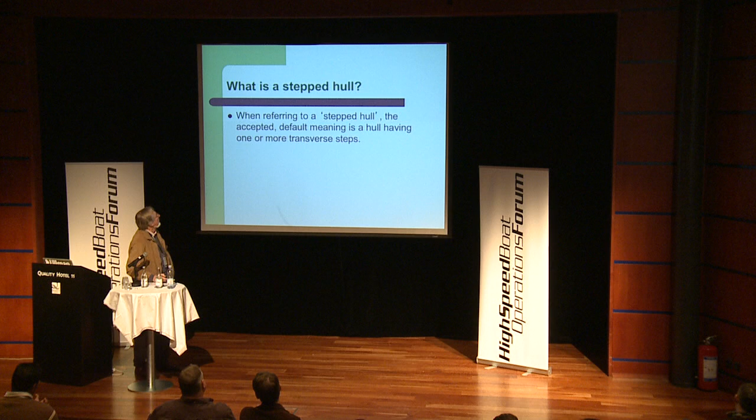So, what is a stepped hull? When referring to a stepped hull, the accepted default meaning is a hull having one or more transverse steps. Some talk about longitudinal steps, which have a similarity to spray rails running down a boat. But in this presentation, I'm only talking about transverse steps, the main idea. So these are the transverse steps.

Some people refer to these as longitudinal steps when the hull is split up into one or more longitudinal surfaces, which have a greater vertical displacement than just an ordinary spray rail attachment. But transverse is what we're looking at here.

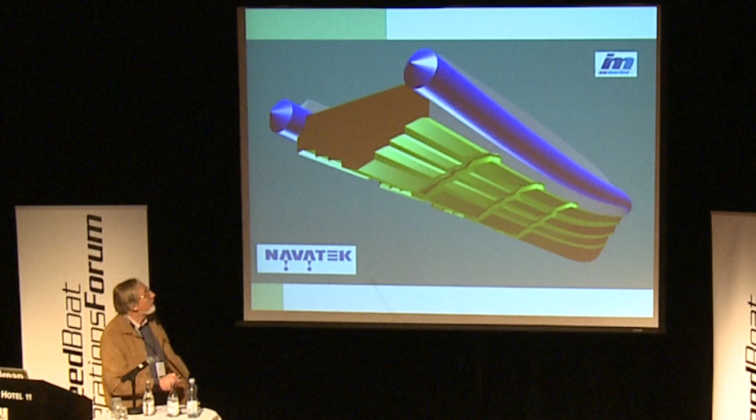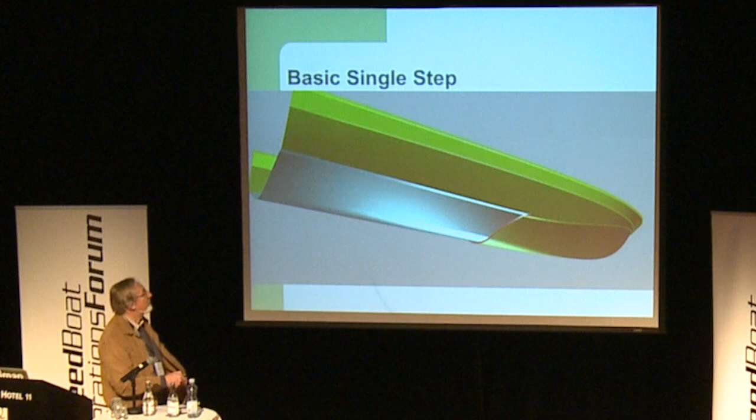The advantages of stepping your hull, in my opinion, you get a drag reduction of between 8 and 12% when the craft is planing. It depends on how good the basic underlying monohull was that you started with. Because when I'm designing a stepped hull, I design a basic monohull first.

And then in the design process adapt the steps to it. The other main advantage is pitch reduction and improved pitch control in a seaway. You get an increased resistance to porpoising, but that's all part of the pitch control, basically.

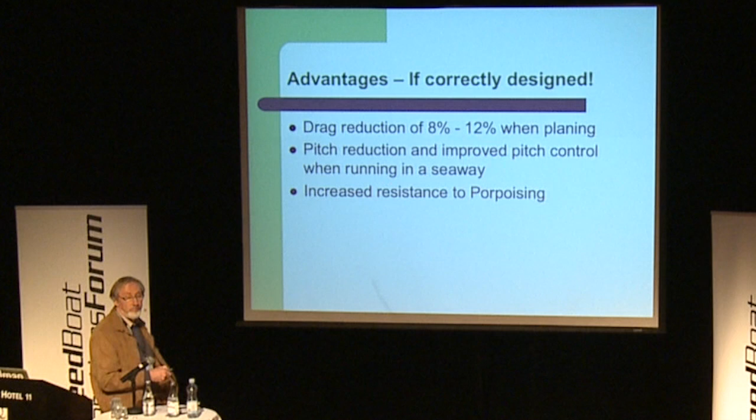The disadvantages: it takes more design effort to get it right. We can't use water jets. The aeration caused by the air fed in under the hull by the step arrangement - they have to ventilate to work. The air mixed in with the water travels into the intakes of the water jets, aerates the impeller, and causes ventilation or cavitation of the impellers, which mucks up the performance of the water jet. So at the moment, stepped hulls and water jets don't really go together.

Various people are working on that aspect, or having semi-stepped hulls. But when you semi-step a hull, i.e. step in from the outside but not the centerline part where the water jet is, you get limited positive results.

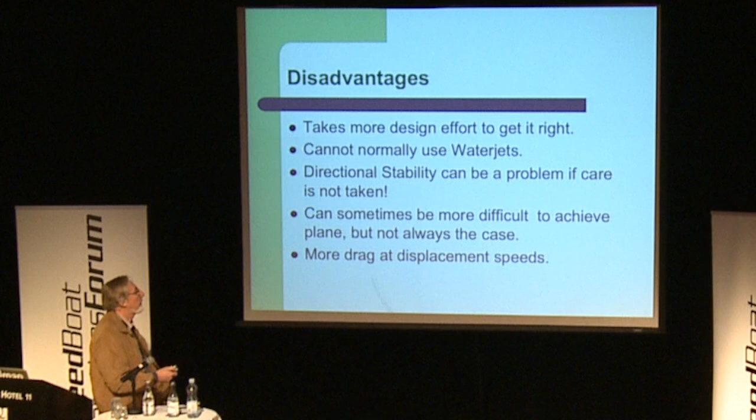The stepped hull's directional stability can be a problem if you don't take care when you're designing it. Sometimes you can have trouble getting on plane, but not often - that's usually a ventilation problem, a lack of ventilation, if you can't get your stepped hull on plane. It's not usually the case with monohull type craft. You can get more drag at displacement speeds, and if you've got a boat that has to do a lot of work at displacement speeds as well as planing, then you need to take the extra drag into account.

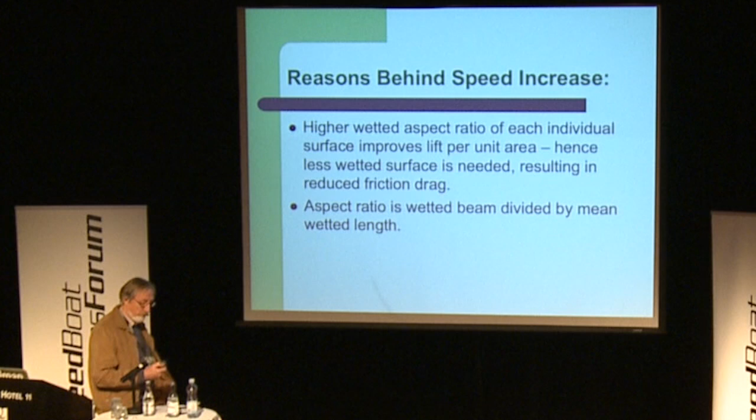Why do we get the extra speed or reduced drag? The higher wetted aspect ratio of each individual surface improves the pressure on the hull, improves the lift per unit area, so you need less wetted surface to carry your load, and therefore you get less frictional drag. The aspect ratio is wetted beam divided by mean wetted length. So the higher the aspect ratio, the wider the beam for the length, and the more efficient the lift you get. There are things that restrict how far you can go with that performance problem, but that's, broadly speaking, the shape of the wetted surface underneath.

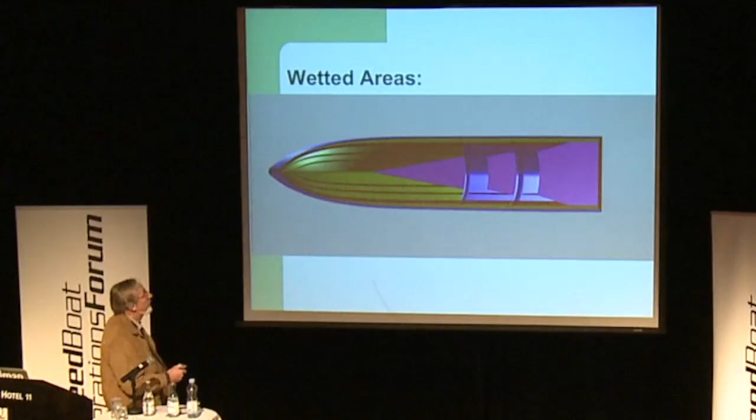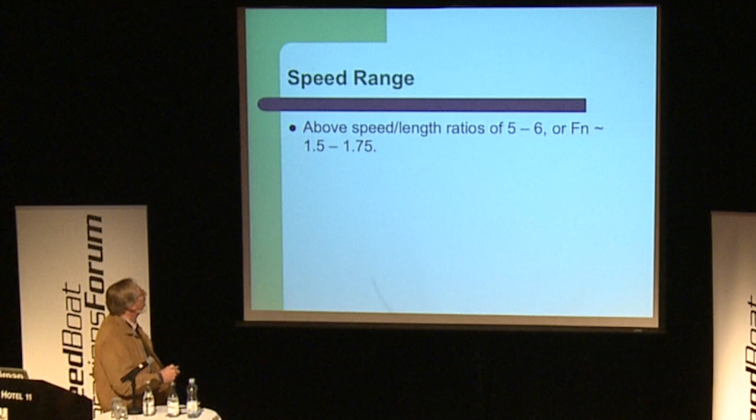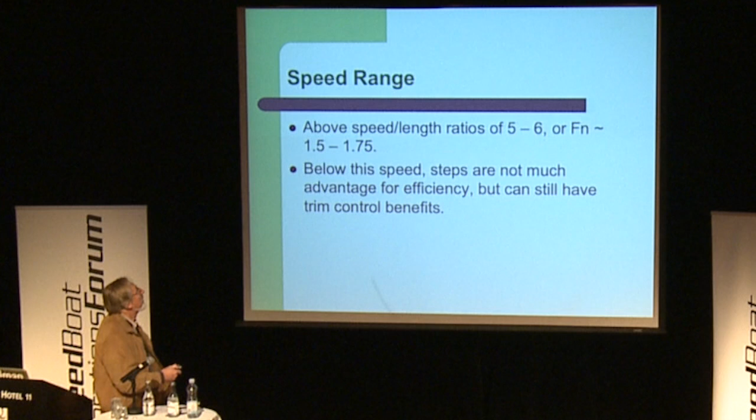Speed range, speed length ratios, V over root L, 5 to 6, Froude numbers 1.5 to 1.75. That's where I reckon the performance advantages start. You can still get some trim control benefits below that speed, but your efficiencies are not going to be much of an advantage. And as you get slower, they become a disadvantage - the steps become a disadvantage compared with a monohull for low speed planing.

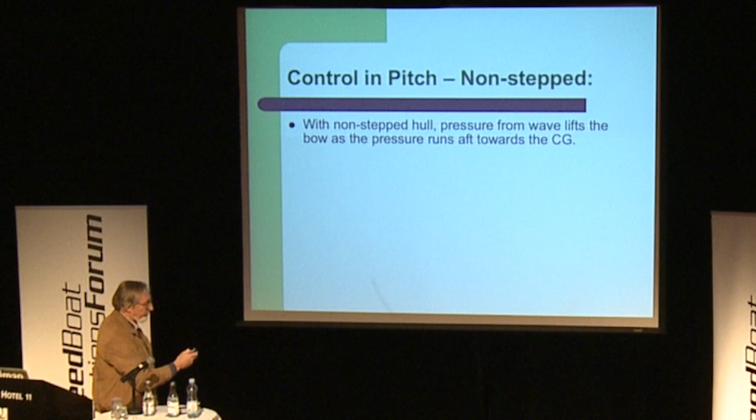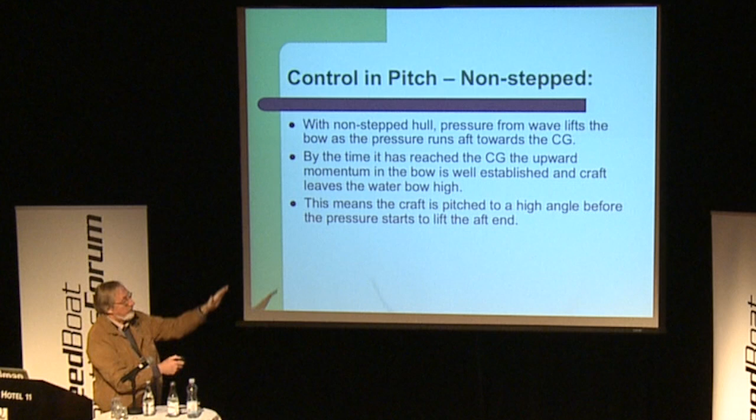The pitch control, which is such a good and advantageous part of stepped hulls, is important. How do we get it? With a non-stepped hull, the pressure from the wave that you hit travels along the hull from bow to stern, lifting the bow. So that pressure is constantly lifting the craft as it travels back towards the centre of gravity and accelerating the bow skywards. By the time it's reached the centre of gravity, the upward momentum is quite high, well established, so that the pressure wave travels past the CG, then it starts lifting the stern.

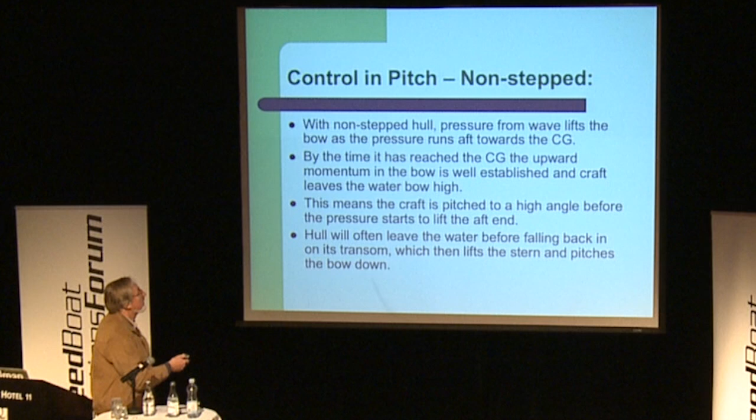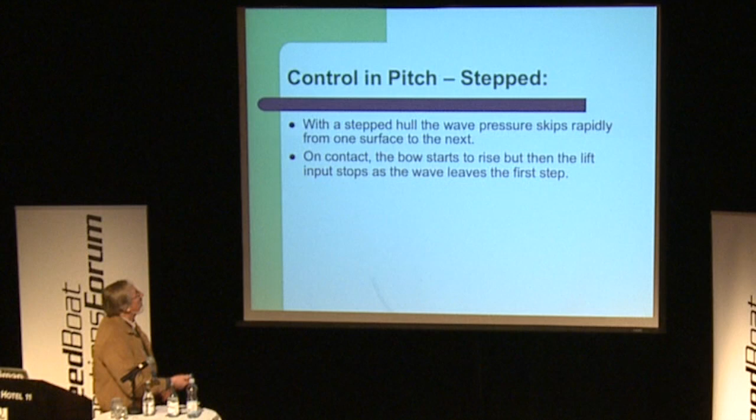With a stepped hull, the wave pressure skips rapidly from one surface to the next surface. What happens is when the bow hits the water, it starts to lift like an ordinary monohull. It then reaches the first step, so the lift ceases, and the input ceases, having raised the hull a certain amount at the bow, but not a great deal.

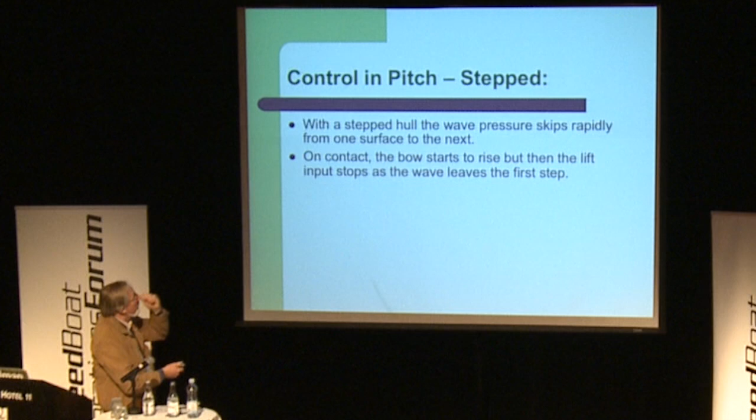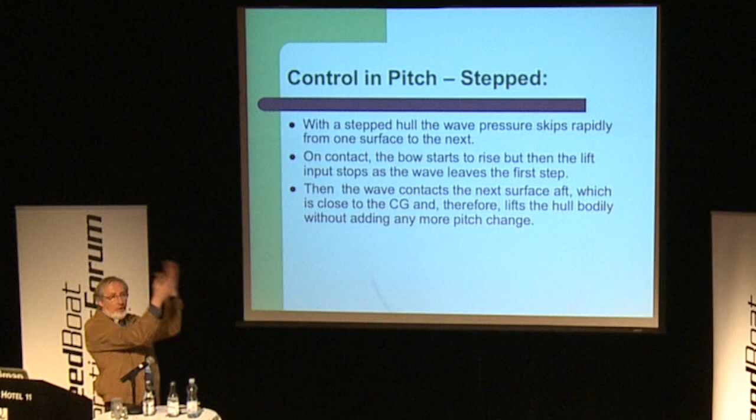So the input stops, then the wave contacts the next surface back, which is much closer to the centre of gravity of the hull. So it then tries to lift the boat bodily. It doesn't pitch it up, it tries to lift the boat bodily. And so your pitch angle is not so great. It then skips again to the aft surface, behind the aft step, and that gives the stern a kick. So the result is that the pitch angles don't change anything like so much as with a non-step monohull.

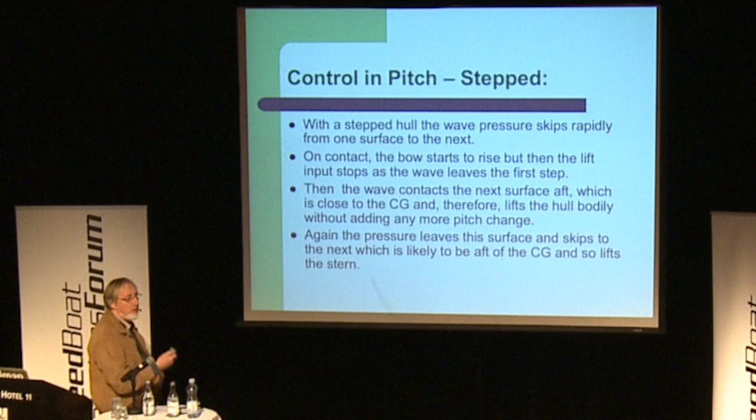We're talking like for like. There are other ways of reducing the pitch of non-step monohulls, trim tabs and other things, trim control on drives, but I'm talking about the hull itself and how it controls this attitude. And this pitch control system also gives higher resistance to porpoising and those problems.

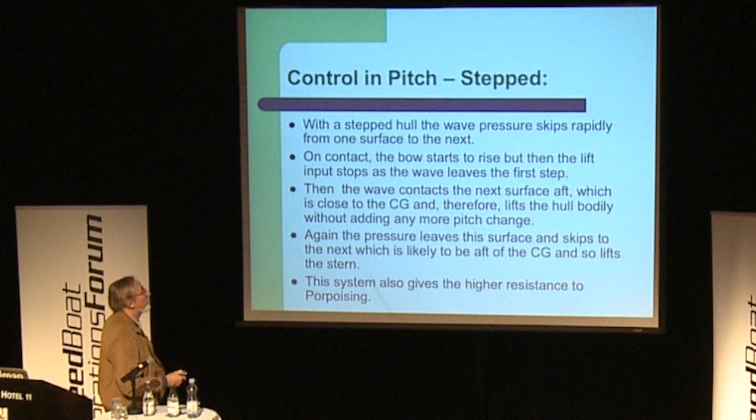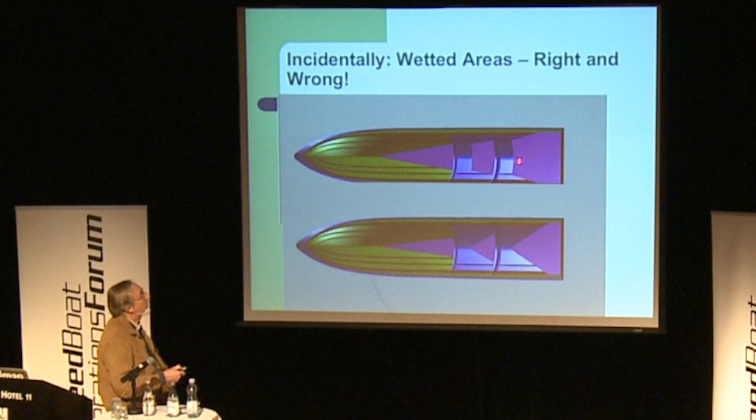Much more the leading edge shape there broadly matches the shape of the trailing edge of the next wetted surface ahead. So that broadly matches this. This is given by Navatek. It's a CFD picture, pressure distributions, which broadly shows this shape that I'm talking about.

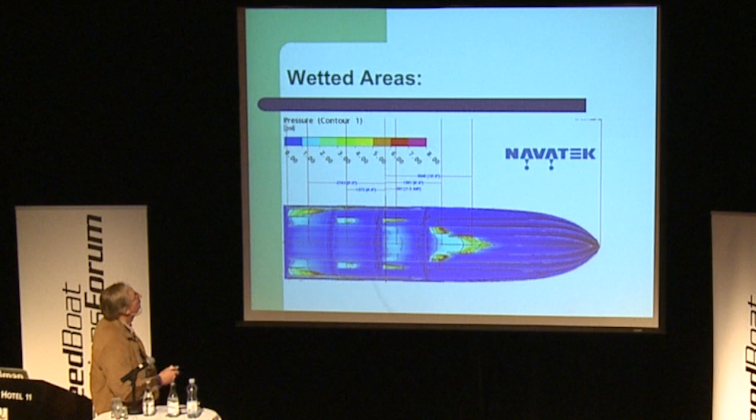Speed and handling. The further aft and deeper the steps, and the more your drag reduction, the faster the boat is, but the worse the handling is likely to be. So as with everything, it's a compromise.

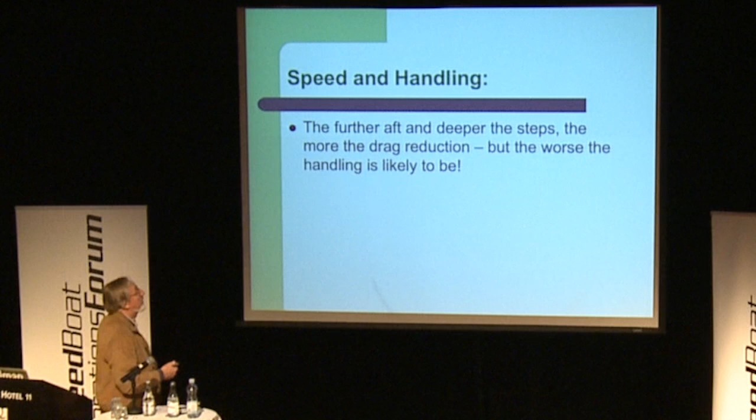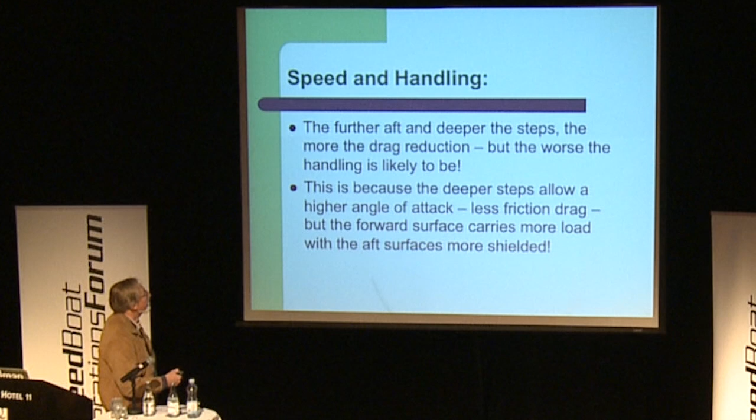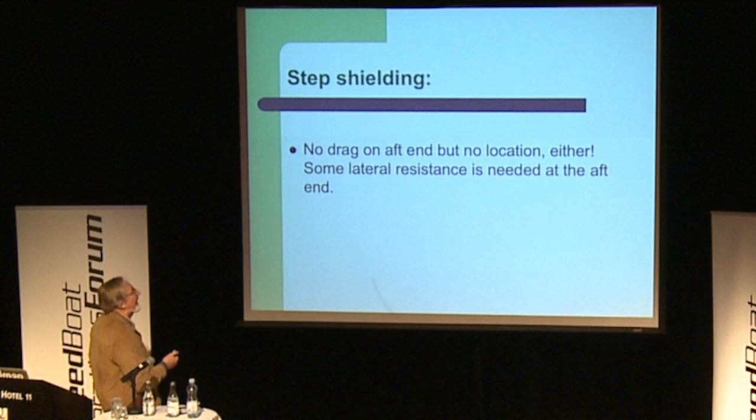This reduces the drag at the aft end, but you get no location in the rear end either. So lateral location is lacking. So the boat lacks, or can lack, directional stability, which can cause problems, as we know some people have met up with. So generally you can get away with an aft center of gravity position for a light boat, which is light and quick.

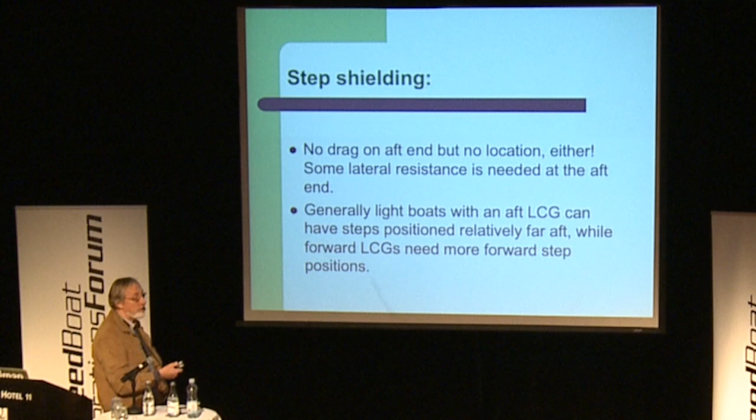The steps can be aft because everything's aft. Even the forward step wetted surface is back towards the stern. You don't need so much area for your lift. You've got a light boat. But if you've got a heavyish boat and forward LCGs, you need the steps to be moved forward. Otherwise, it's the forward step that does all the work, and the rear steps, the rear surfaces, get shielded.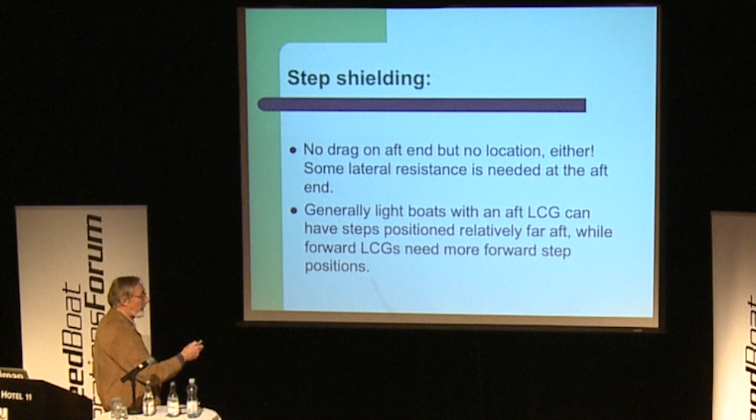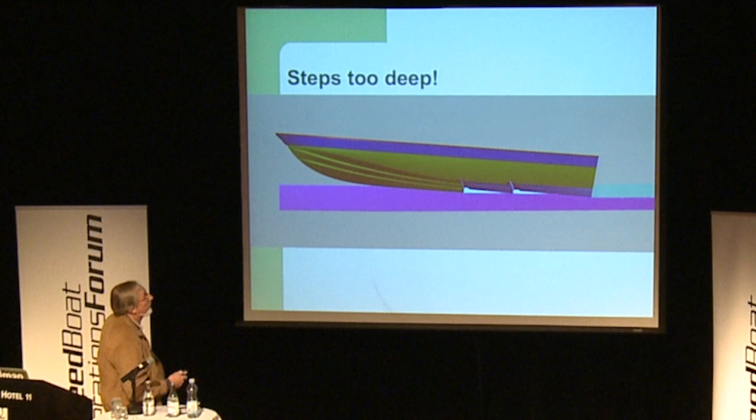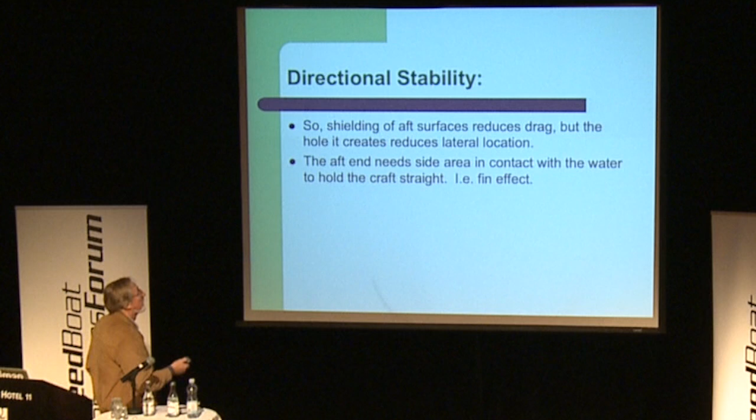So this is broadly illustrating what I'm saying. If the steps are too deep, you don't get much of this in the water. You don't get much side area in the water. So shielding the aft surfaces reduces the drag, but the hole it creates reduces your lateral location. You need the side area to give you that directional stability, the fin effect, like the flights of an arrow. You need that to hold you straight. Otherwise you have this tendency for high-speed broaches.

This is all part of getting the design right. So if you allow the back end to be well in contact with the water, if the aft step's not too deep, then the aft surface will be in contact with the water over a reasonable distance, and therefore it will have enough lateral contact with the water too to hold you straight. You shift the emphasis, take some of the lift off the forward surface and put it on the aft surface. It's safer that way. It's not always the most efficient, but you still get an efficiency gain.

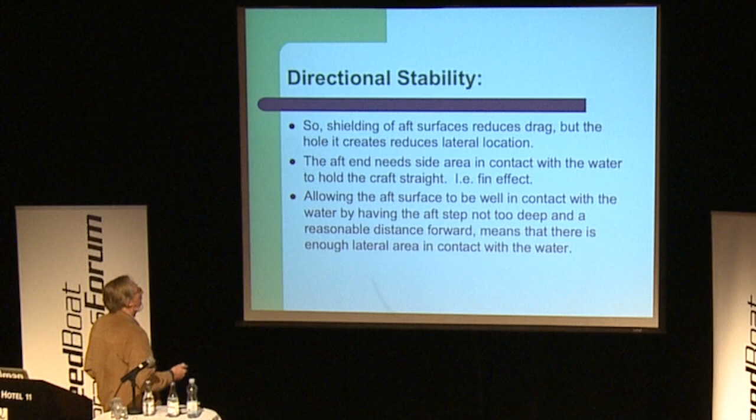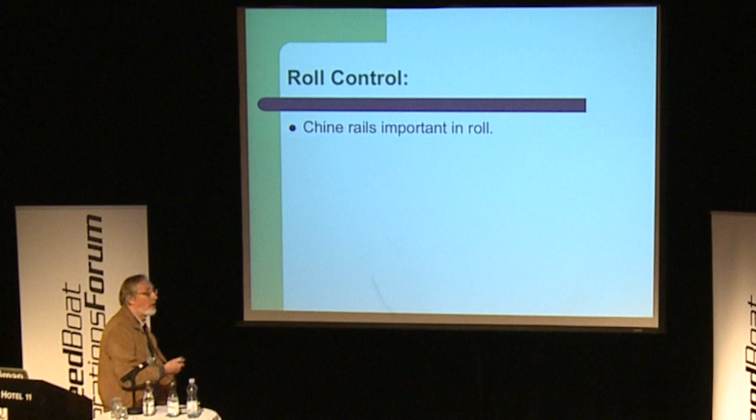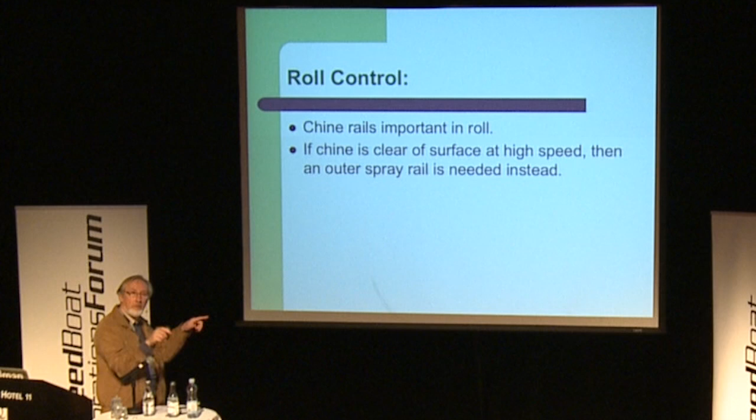You have to control the boat in roll as well. Because the pressures on the bottom are higher with steps, the boat's liable to be higher in the water. Chine rails are important to control the roll. If the chine's clear of the water at high speed, then you need an outside spray rail to control the water. You need an outside edge.

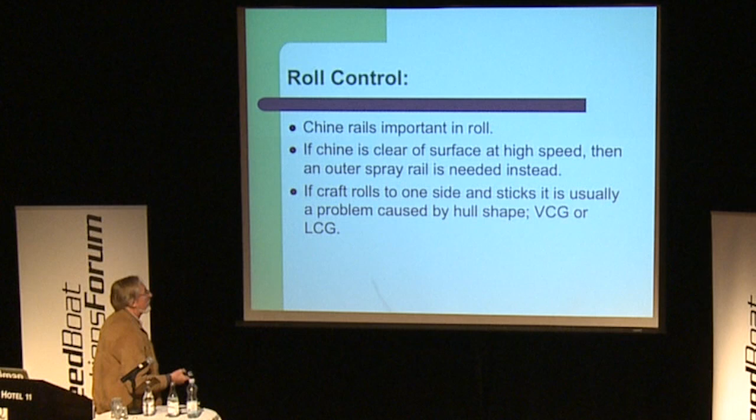You've got to catch the spray at the outside edge. If the craft rolls to one side and sticks rolled to one side, the problem is usually caused by the hull shape, Coanda effect on a rounded surface sucking that side in, the vertical center of gravity being too high, or the longitudinal center of gravity being too far forward, which causes the forward curved surfaces to be wetted, and the Coanda effect can come into play.

Chine walking, where you're walking from side to side, is slightly different. The craft is trying to stabilize itself. It falls over and it comes back upright, but there's too much or too little righting moment. Usually there's a bit too much and not enough damping, so it overcompensates. It rolls to the other side, which kicks it back, and you can set up an oscillation.

It needs more research. You can get some answers if you tank test models. It's very difficult to get any answers on the drawing board in a design office unless you do some actual tank testing. Maybe CFD will start to help us. But a lot of it is damping, and a lot of it is to do with the roll moment of inertia of the boat and the natural frequency in roll. If the righting moment inputs coincide with the natural roll frequency, you can get this oscillation set up, and that can obviously get worse.

It applies to non-stepped hulls as well as stepped hulls, so it's a general problem.

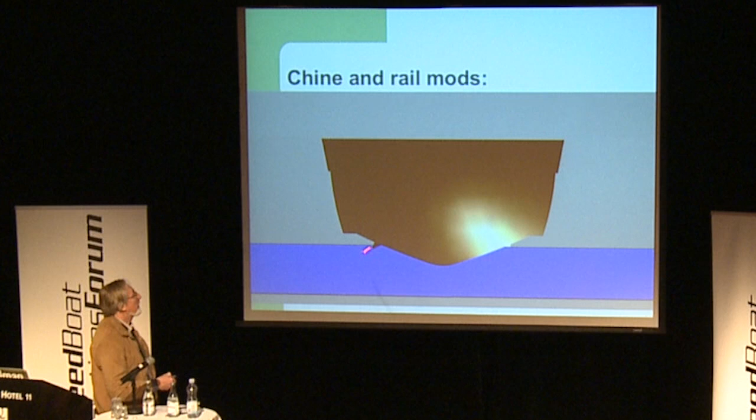You can put the down angle on the chine. It depends which one's working. If you've got a roll or chine walking problem, you'll find that one or the other of these will do the job. If you do them both, do the spray rail first, then the chine rail - if that one causes an improvement, this one will hardly improve it further. If that one doesn't do anything, then maybe using the chine rail will do it instead. It's an experiment that you have to do on the actual boat.

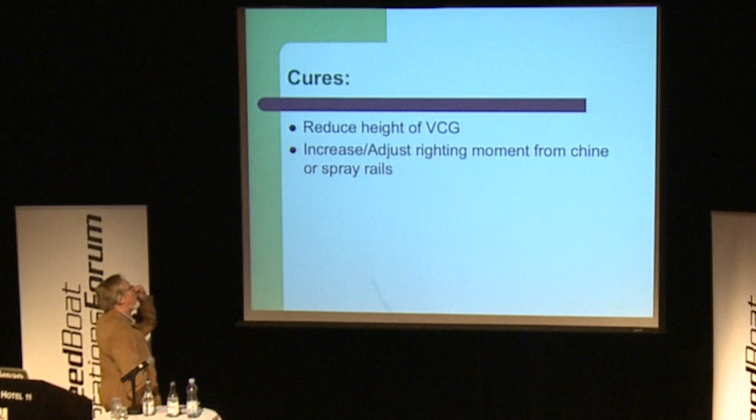So reduce the height of the vertical center of gravity, increase or adjust the righting moment from the chine or the spray rails, the way I was describing in the picture.

This is often coupled with yaw. If you get in a boat that's chine walking, you don't often think of the fact that it's yawing from side to side, but in practice, in truth, it is probably doing that. You know that if you turn a V hull, it will bank. If you turn it the other way, it'll bank the other way. So tied in with this oscillation moment is a wriggle of the boat in yaw.

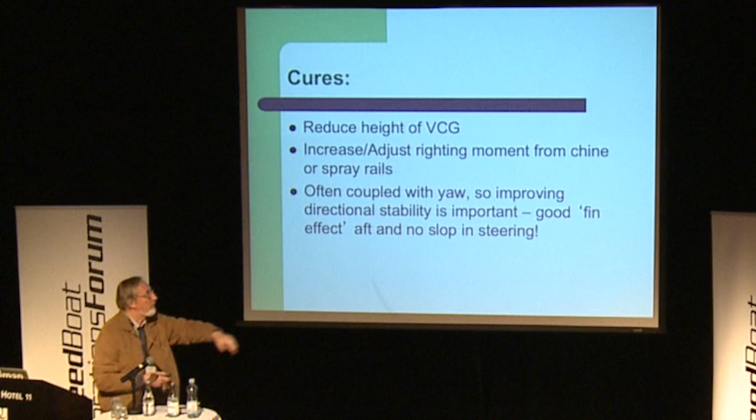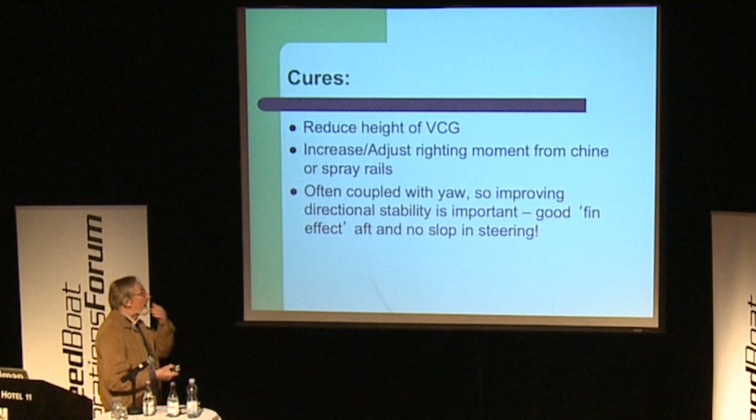Even if you can't feel it, even if it just feels like chine walking, if you improve directional stability - bigger rudders, bigger fins at the aft end, make sure the steering has no slop in it, very important - then that can often help the chine walking problem.

Oops, excuse me. Can you still hear me? Good.

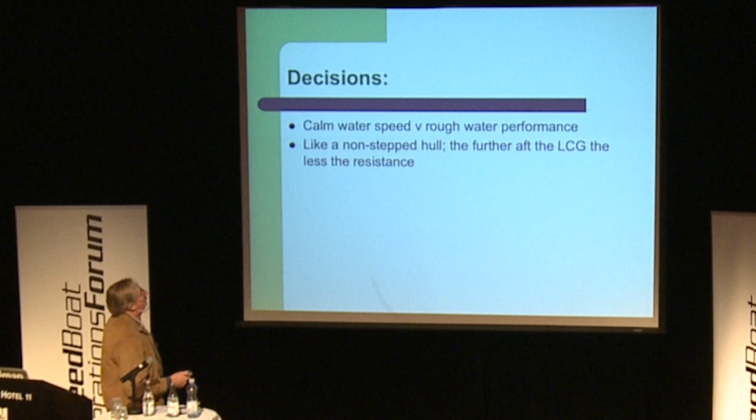Decisions you have to make, same as for non-step boats, but it just gets more complicated. Calm water speed versus rough water performance: the further aft the center of gravity, the less the resistance; the further forward the center of gravity, the better the rough water ride. But for each of those positions, the ride and resistance are usually improved over the non-stepped hull.

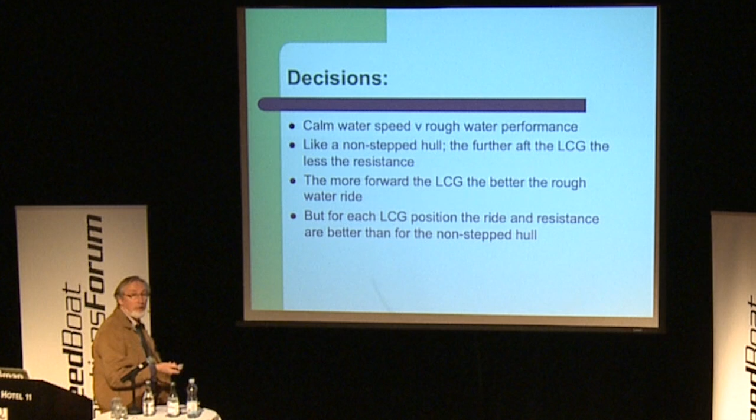More decisions: the number of steps you put in the boat, the longitudinal position of those steps, the actual height of the steps, and the step shape in plan view. People have different opinions - I emphasize I'm giving you my opinions on these things.

Weight and hull loading, of course, affects the number of steps, the speed you're going, the dead rise, the longitudinal center of gravity position, and ventilation. I'll just put my picture up here again.

You can see some channels across here behind the steps. It's important that steps are ventilated. There's a channel either from inside the boat through tubes - which is complicated - or a channel from the outside into the back of the step here. Because if it doesn't ventilate, atmospheric pressure pushes all the water along with you, so you find you're dragging the whole ocean, and the boat stops dead.

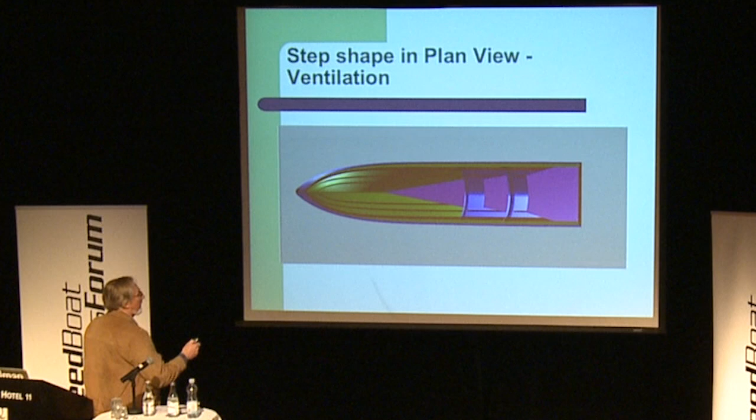So it's an important aspect, although it's not usually a problem with monohulls. It can be a problem with catamarans or multi-hulls, trimarans, where the chines are well below the surface when the boat's static. With a deep V style monohull, the chines are usually pretty close to the static waterline anyway.

Lift and drag - I use a modified Savitsky system because I don't know any other way of doing it, but you can't buy it anywhere, we can't buy programs for it. You have to do your own.

Daniel Savitsky, who created this very useful system, emphasizes that it's not designed for the speeds that we make boats run at. So you have to put your own fiddle factors and things on it.

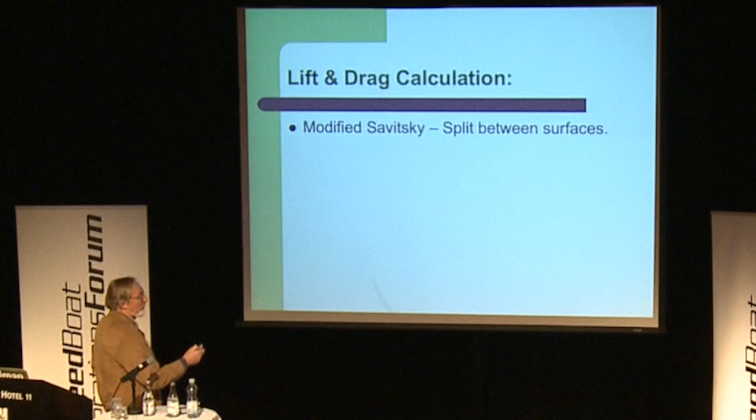With a stepped hull, you have to go further. You have to split it up. Why split it up between the surfaces? And you have to combine the effects of all these. So how do you work out the wetted lengths of the surfaces, i.e. the wetted areas?

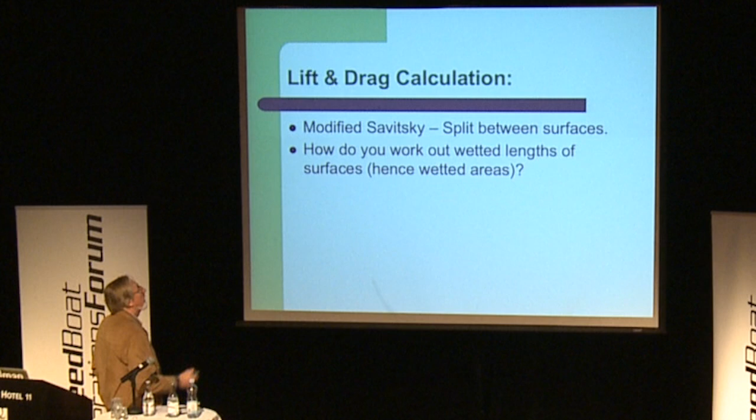These are the wetted lengths. So in order to work out the wetted lengths, you've got to work out where the leading edge is of those wetted lengths.

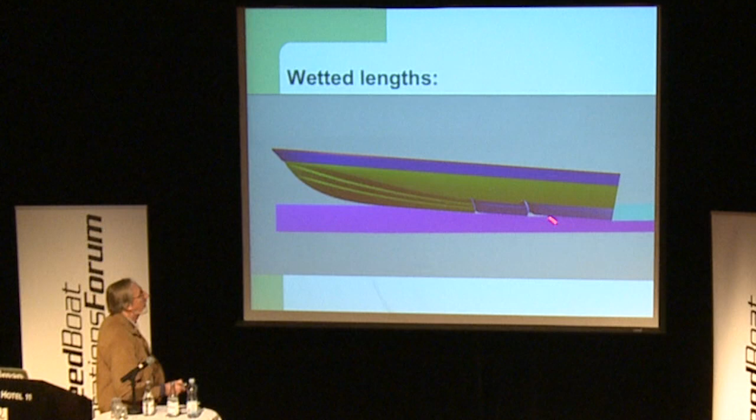So the paths, the streamlines - the water's heavy stuff, doesn't like to move out of the way. If you're just on the plane, at displacement speeds, of course, you move solid water out of the way of the ship and the craft. At lower planing speeds, there's still quite a chunk of solid water being shifted. And so the streamlines of the water leaving each step can leave at the angle of the buttock lines, the angle of the hull surface ahead. So it drops down and then climbs back up again.

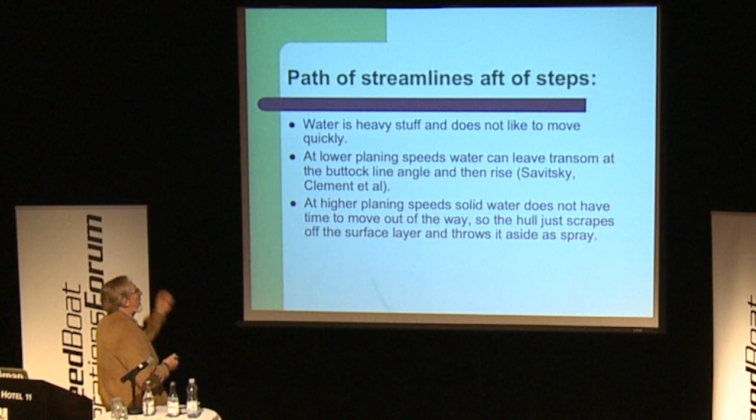Savitsky and Clement, and others, have produced formulae for working out what the shape of that surface is. But in my opinion, at higher planing speeds, the water doesn't move at all - solid water. It doesn't have time to. It doesn't realize the boat's coming. The boat arrives and it's taken by surprise.

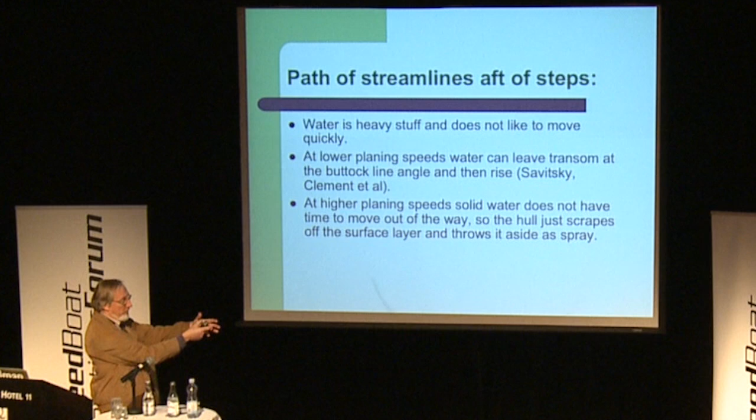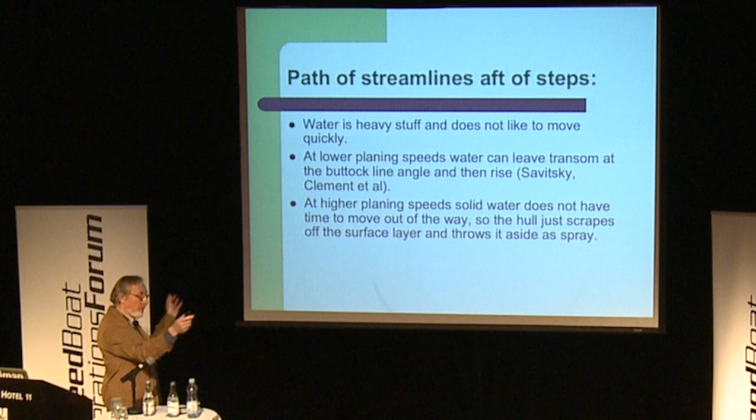So what the forward surface does is just take that upper layer of water and chucks it out of the way as spray. He just throws it aside. So it's all spray - it just converts it into spray, folds it away across the top of the surrounding sea. So the underlying solid surface doesn't move.

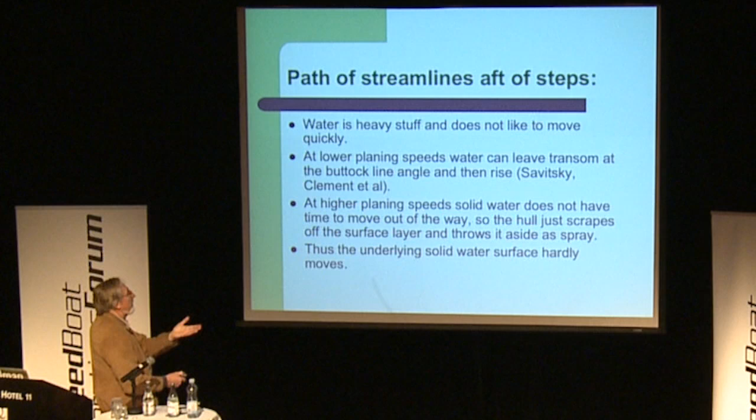So you get this area here, chucks this top layer - I should have done this in layers, I'm sorry about the pink water. It works, the theory works in blue water as well. You chuck the spray off here, so you scrape the surface off. So the underlying surface lines up with that level.

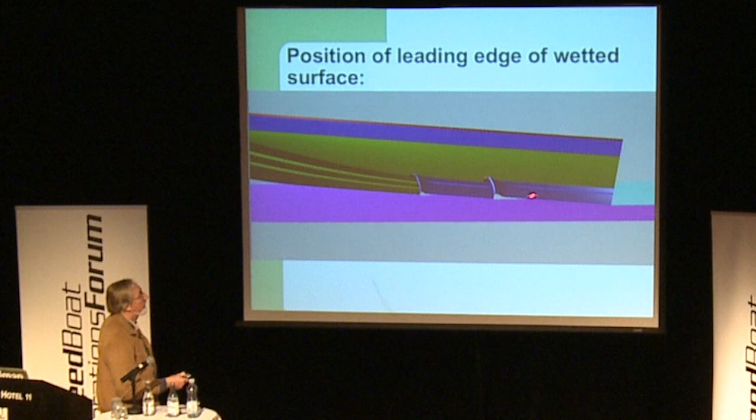That careers into the next surface, that scrapes off the next layer, depth of water as spray, chucks it out to the side, bouncing it off the rails here. And the underlying streamlined surface then matches up with that and carries straight on, in my opinion, parallel with the horizon, if you like, until you hit the next surface aft.

Now that theory may not be strictly accurate, but I think it is more accurate than using other systems for once a craft is well and truly on the plane and running fast.

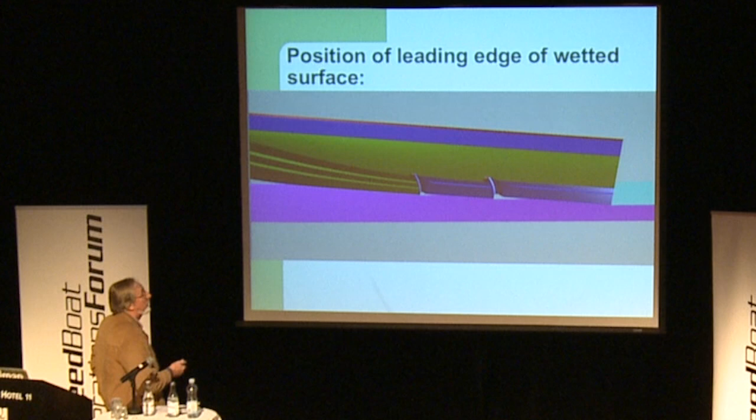Gives that sort of shape, as I said before, so that you've scraped all this off as spray. The underlying streamline that lines up with that goes straight back to that corner, and in between. And same back here - straight back, straight back.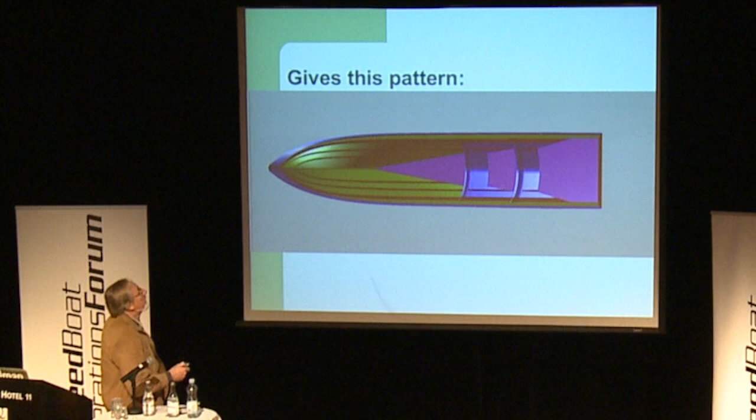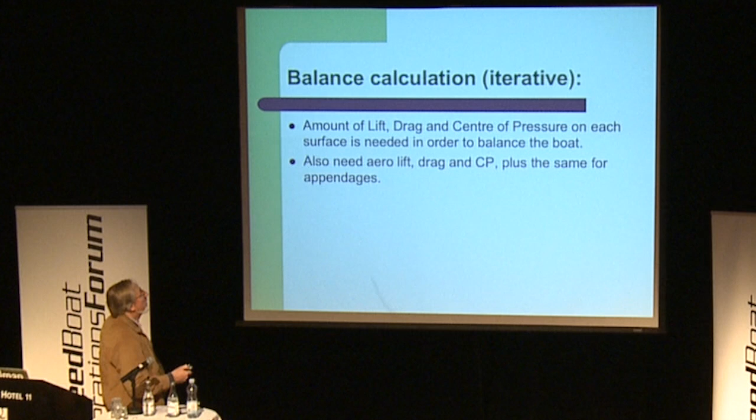So you then have to balance all this up, and it's an iterative calculation, which you have to do with monohulls too. So you take all your lift, drag, center of pressure on each surface. You need the aero lift, drag, center of pressure, plus the same for all the appendages you're dragging through the water, and your thrust lines.

And the final lift resultant must be under the center of gravity. So the results of all these forces have got to be under the center of gravity. So your spreadsheet program, or other program, or whatever system you're using, has to iterate between different trim angles of the boat until all these forces line up.

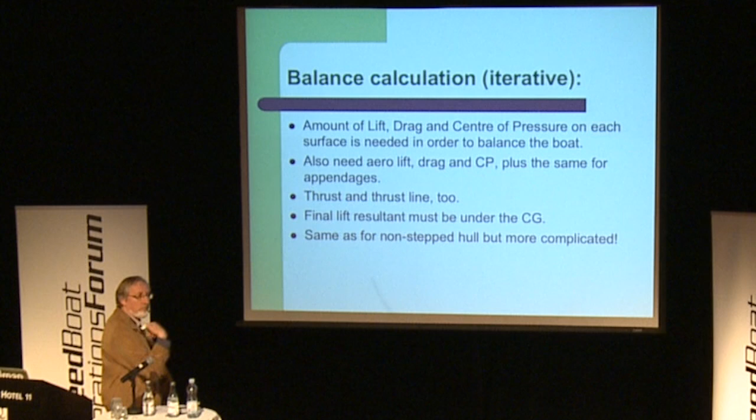It's the same as for a non-stepped hull, but it's more complicated because you have to do it for each surface. And there are other complications on how you treat wetted lengths - well, we've done the wetted lengths, but how you treat Reynolds numbers and funny things like that. Reynolds numbers require an underlying length distance, and there's some controversy as to how you do that.

So in the future, CFD is getting closer, but my feedback is it's not reliable yet, although we're trying. It works better at some speeds than others, the results are. I've been working with Navatek in Hawaii, who are very good at their CFD.

And I've been using my old-fashioned Savitsky system, adapted myself, producing drag and lift figures my way, firing them over to Navatek, and they've been applying their CFD to it, and we've been seeing how close they are to each other. Basically, we're getting closer to each other, but I emphasize - which of us is the closest to right? Should they be getting closer to me, or should I be getting closer to them? Don't know the answer to that yet.